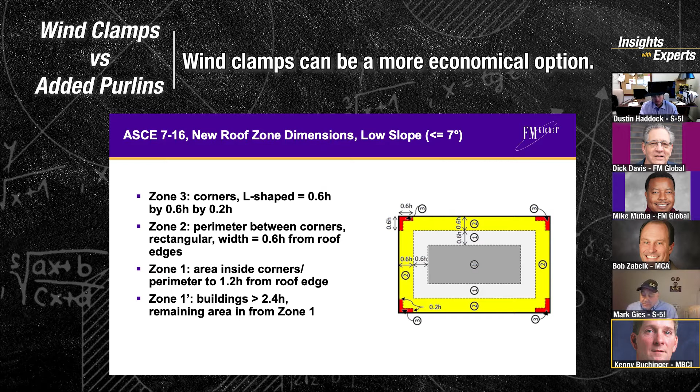Another point that we probably should make is the fact that the wind clamps versus additional purlins or joists often is a more economical solution, because quite often, now that we know that there's different wind zones on a roof, the 5-foot purlin or joist spacing will work quite well for the main part of the roof. It's when you get into the edges and the corner zones that it may not work.

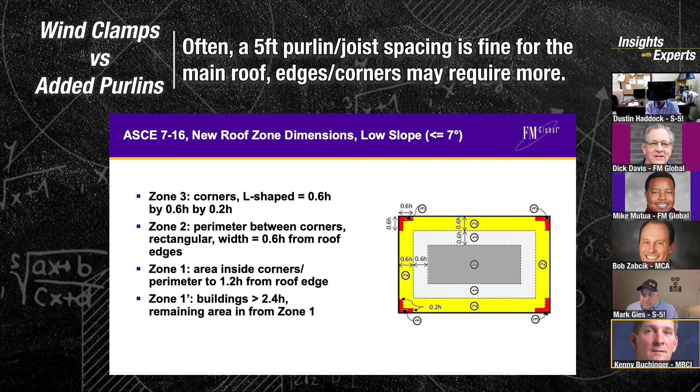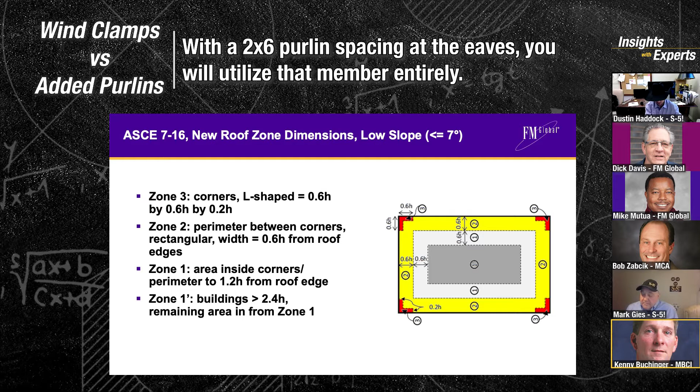And when you talk about the edges, let's just talk about the eave. If you do wind up going to a 2'6" purlin or joist spacing along the eave, at least you're using every bit of that member, all the way from one end of the building to the other.

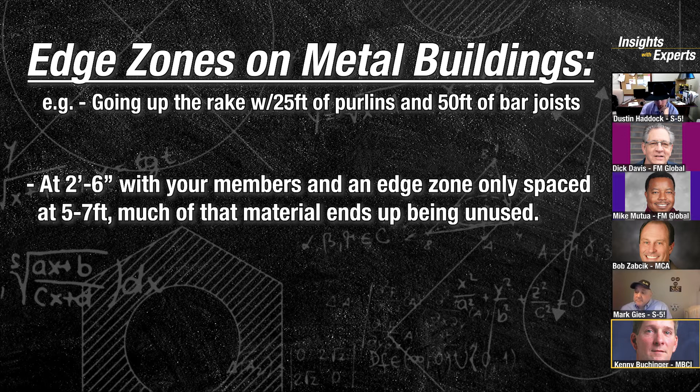Now, if it's a metal building and you talk about edge zone going up the rake, and you've got a 25-foot bay, which is purlins, but let's say you got a 50-foot bay bar joist, if you have to go 2'6" up that rake with members, and your edge zone is only, say, 5, 6, 7 foot, you've got a whole lot of purlin or bar joist that isn't being used. So you've put a lot of money into that building when you really only needed that extra member for the first 6 foot. But obviously you can't let that member hang in the space. You've got to go to the next frame.

And that's the beauty of the wind clamps. You're able, in a lot of cases, to keep that 5-foot purlin or joist spacing and just use the wind clamps to increase the capacity of that roof in just the areas that you need it. And so that's economizing the way you designed the roof.

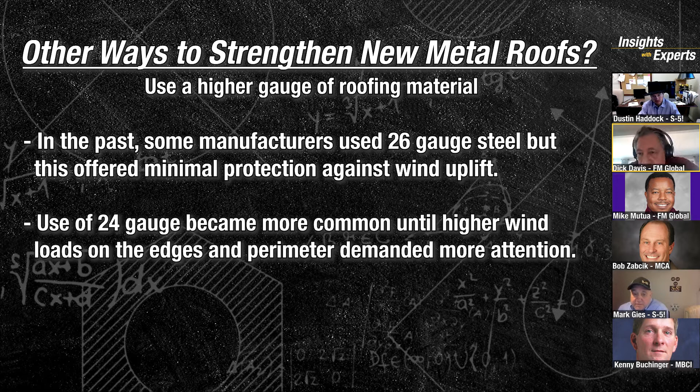What other ways are there to strengthen a roof? If you go way back, you'll see where some of the manufacturers use 26 gauge steel on rare occasions. That doesn't work so well for wind, but most commonly they use 24 gauge steel. But then as wind loads started to get higher and people paid more attention to the perimeter and corner areas, some manufacturers started going with 22 gauge standing seam roof, which is probably about as thick as you'd want to go and still be able to roll it satisfactorily. That's one approach that manufacturers use.

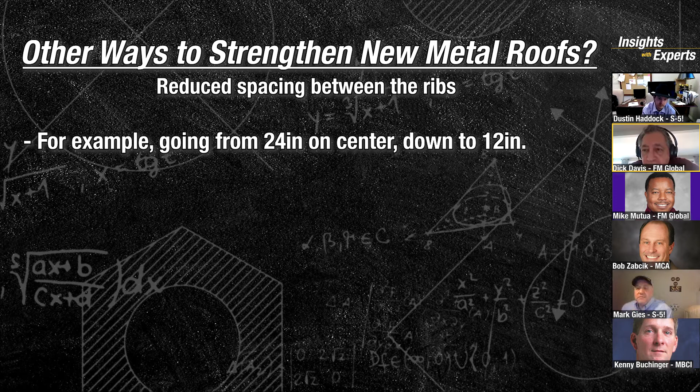The other is to cut down your rib spacing. Right. So most are 24 inches on center, some go down to 12 inches on center. But then that means there's more cost to that from an assembly perspective, right? Right. There's always going to be some cost associated with it. Yeah, not to mention the guy up on the roof who's got to get all that straight, right? I mean, from an engineering standpoint, it's straightforward.

As Dick mentioned, you got the rake area, which is an edge zone. Pretty straightforward approach from an engineering standpoint to just say, oh, I'm going to use 12-inch or 18-inch in this rake area for the edge distance that comes out, which is usually anywhere from 10 to 30 feet, something like that, and then you transition back over. But when you're up there on a roof and you got all these different bundles of standing seam panels in different sizes, it may not be so easy to figure that out.

When I started back in 2008, the solution was to do through fastening on your standing seam roofs, which, as we know, restricts the thermal movement of that standing seam roof. So that tended to not be a very practical solution for clients. And over time, those roofs did develop those leaks. So the clamp option is the one that I think works the best.

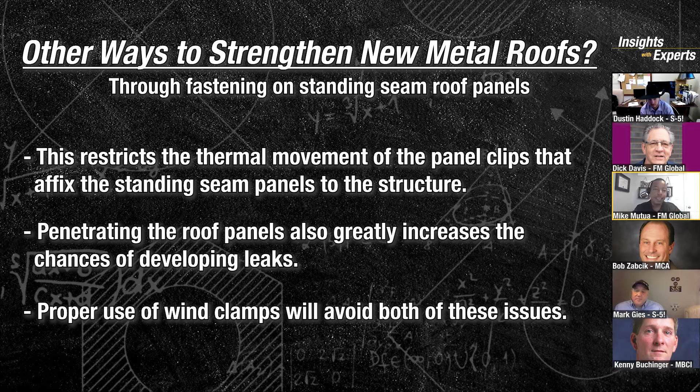But just having the technical numbers to know by adding X clamps in which zones, how much additional uplift do we get? Dick, I know you've talked to me a little bit about, from your own testing that you guys have done, just the importance of the right external seam clamp and sort of the impact on that. I know you guys have done some tests on things that don't fit right.

So what's your perspective and take on that? When we have insured clients that have existing buildings and the building was not designed properly for wind, maybe they didn't increase the resistance in the perimeter and corner areas, we have gone back and done tests for our insured clients. And we've had situations where we've got an existing building. It doesn't have any reduced purlin spans or anything like that.

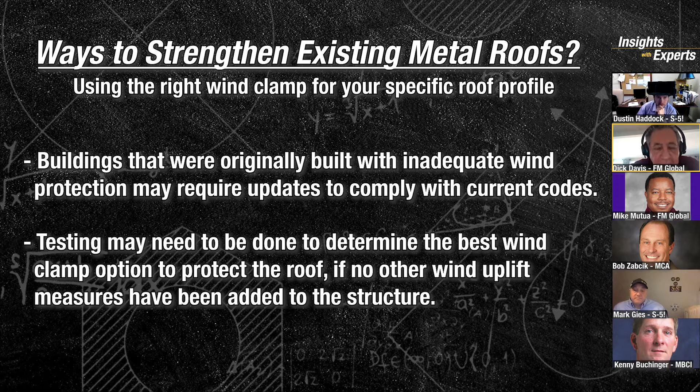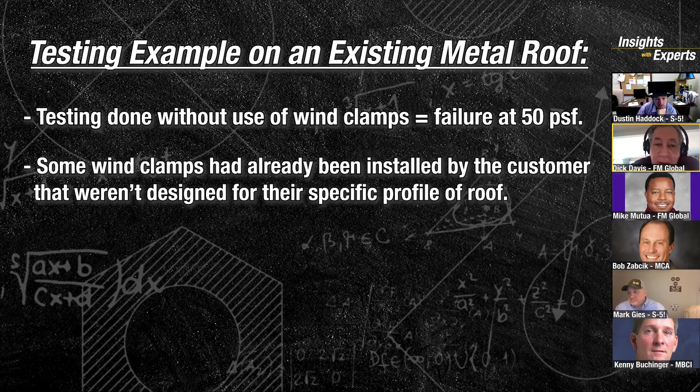And this one in particular, we ran the test on the system as is, without any enhancement at all. It failed at 50 pounds per square foot. Then they had already installed some wind clamps, but unfortunately, on one of the buildings, the clamp that they used was a proprietary clamp that was actually for a different standing seam roof design, not for the one that they had. It didn't fit properly.

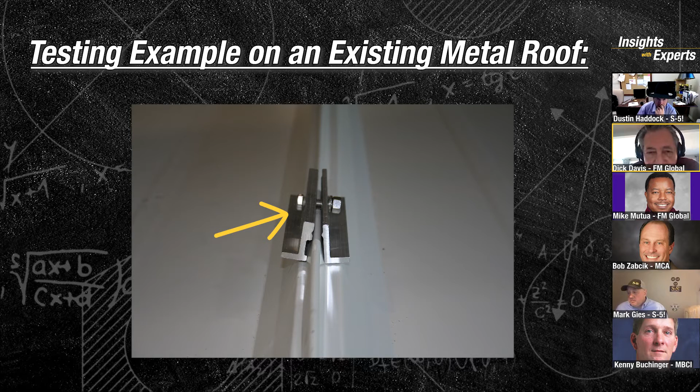And what you see here, it's a little bit exaggerated because we hadn't tightened it yet, but if you zoom in on this photo, you can see that that clamp does not fit well onto that seam. And there's a single bolt and it tightens over the seam, not into the side of the seam, which is preferable. We ran that test anyway, just because the client already had installed some of them. And we said, look, it's not going to work that good. Well, we went from 50 to 60 pounds per square foot before it failed. And that was not a good enough increase.

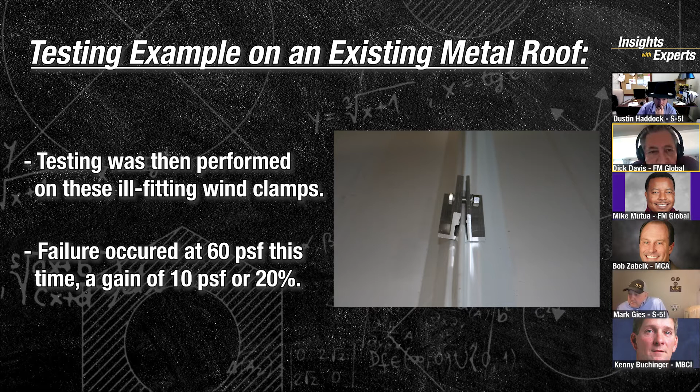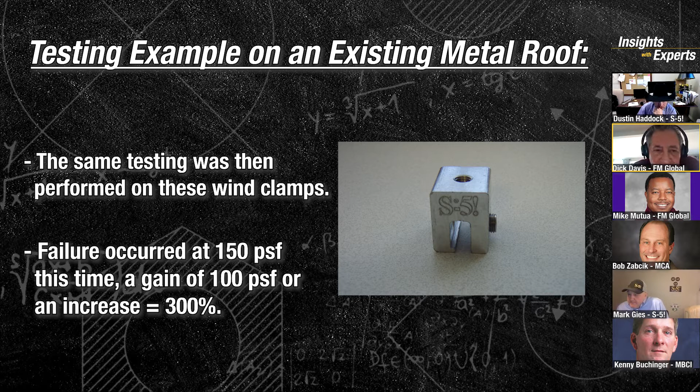So then we went ahead and said, look, I'm going to get a clamp, and it's the one you saw. This one fits the seam properly. We're going to run the test again, exactly the same way. We went from 50 to 150 pounds per square foot. Because you're forcing the failure mode to change. And in this case, the clamp fits the seam properly, and that's the way to get all you can out of the existing roof.

You mentioned to me your international client base and how you've somehow got buildings that were never in compliance and now are a part of the policy that you have with your customer, and how that is driving some of this demand on the retrofit side. So I don't know if you want to talk a little bit about that.

Sure. The preference is really to use external seam clamps because, if installed properly, you're going to increase the wind resistance and you're not going to create potential problems related to roof leakage. It's important that it be properly fitting, otherwise you're going to get only a marginal increase in strength. But I do want to talk about the thermal expansion issue, and here's an example of a one-piece clip on the left, and then you have a two-piece clip on the right.

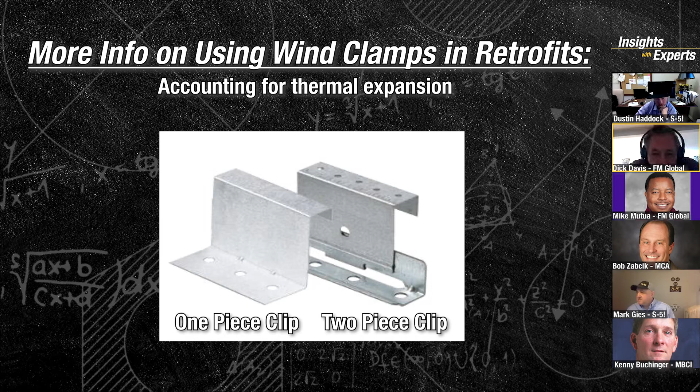So if you're going to add an external seam clamp, if it's the one on the right and you're going to clamp that seam to the web of the top part of that clip, you're not going to restrict thermal movement because it's still going to be allowed between the base of the clip and the top part of the clip. But on the one-piece clip, if you clamp these two together, you're not going to allow that standing seam roof to slide along the internal clip, so you're going to restrain your thermal movement.

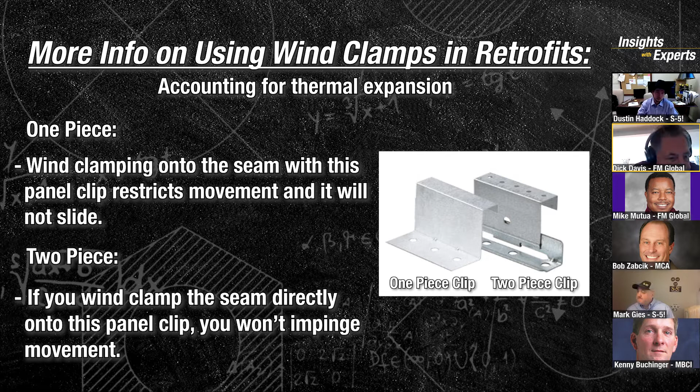So you want to avoid what some people call oil canning or dimpling, which could happen if you prevent the thermal expansion. The two-piece clips, you're fine. That allows you to provide for thermal expansion, yet you're still going to be able to clamp the seam to the top part of it.

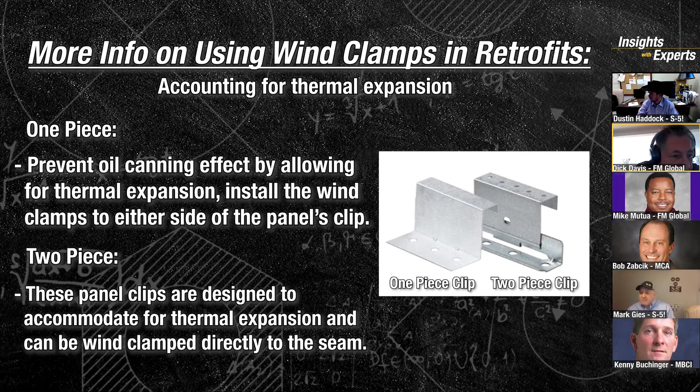Well, I hope everyone was taking notes on all that valuable information, but just in case, let's recap. When it comes to new construction, using wind clamps or external seam clamps can be a much more economical option over added purlins or higher gauge roofing material. When working with an existing building, wind clamps are an even better option. But remember, choosing the right clamp is vital. Otherwise, the increase in strength you gain may be negligible. And don't forget to take into account the type of roof clips you're working with. Otherwise, you may risk impinging the thermal movement of your roof seams.